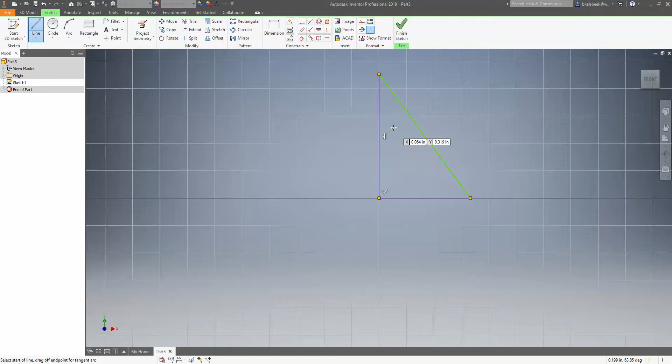The important thing about the revolve tool is whatever you're making, most of the time, needs to be a closed shape. So if I filled this up with water, it wouldn't leak anywhere. There's no holes or gaps anywhere. It's a closed object or closed shape.

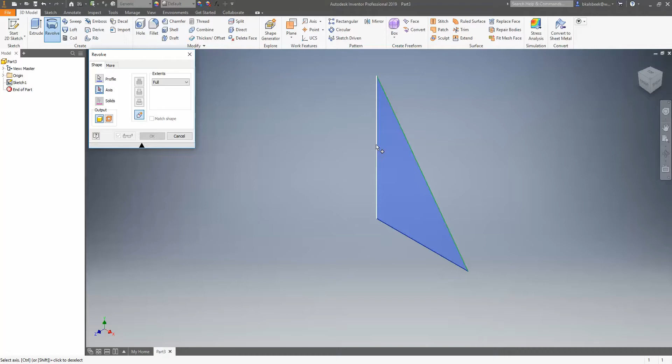So when I take this and I finish the sketch, when I extrude, it only extrudes along a central axis—either one direction or the other, or a mixture of the two. But when we revolve an object, you select the same profile, but instead of selecting a direction linearly that you want it to go, you're going to rotate it around an axis like the central one there.

So with that, you get a shape kind of like a little cone, like a traffic cone. You could also rotate it around a different axis and it will give you a different shape, and you can kind of play around with what that would look like.

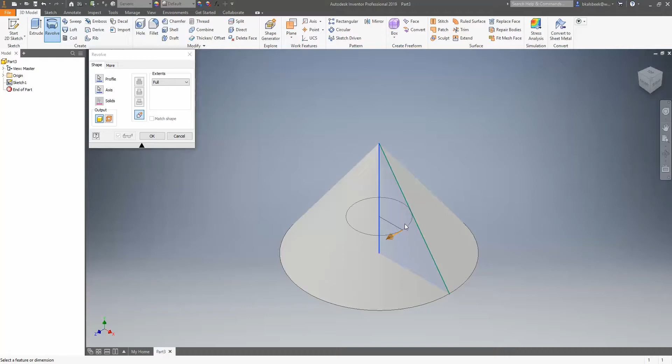So it's revolving around that axis. It's taking that and it's almost sweeping it around that axis.

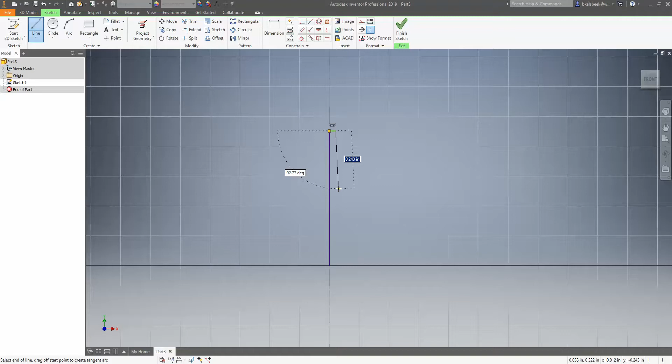You can take that and make it something a little bit more complicated if you'd like. You can make things that are typically made or machined on a lathe, which is a tool that spins really fast and usually makes things like a baseball bat or a candlestick or the leg of a table. That's what a lathe is typically used for.

But you can make something like this—I'm just kind of being creative. So something like this, remember, it has to be a closed shape.

If you need to, if you're making a shape that's all the way out in the middle of nowhere, you may have to create a separate line in order to establish a rotating point. So you could use this to make a little candlestick or something like that.

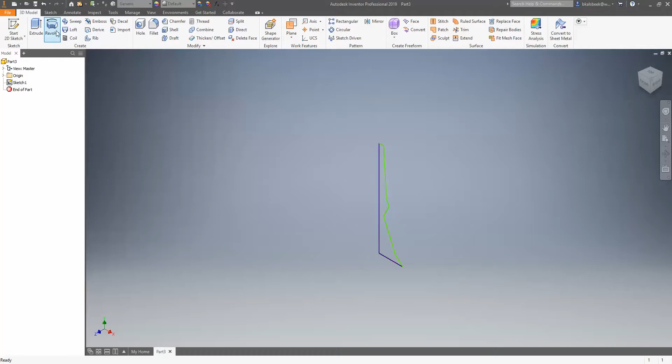You could also take this shape if you wanted to not use this central line to rotate it around. You could come in here and make a different axis, a separate or detached axis. I'm going to have to come in here and right click and make it a construction line. I don't want it to be used in the sketch as just a reference line.

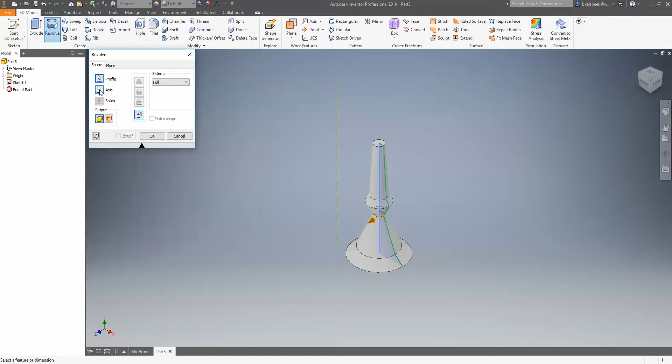So instead of using this as my central rotating axis, if I click this axis, then I get a completely different shape. It's now taking that profile and rotating it around this axis, so it gives me a completely different shape than if I use the line that's in the sketch.

So that's kind of the 101 basics of the revolve tool. Play around with it and see if you can make something really cool.